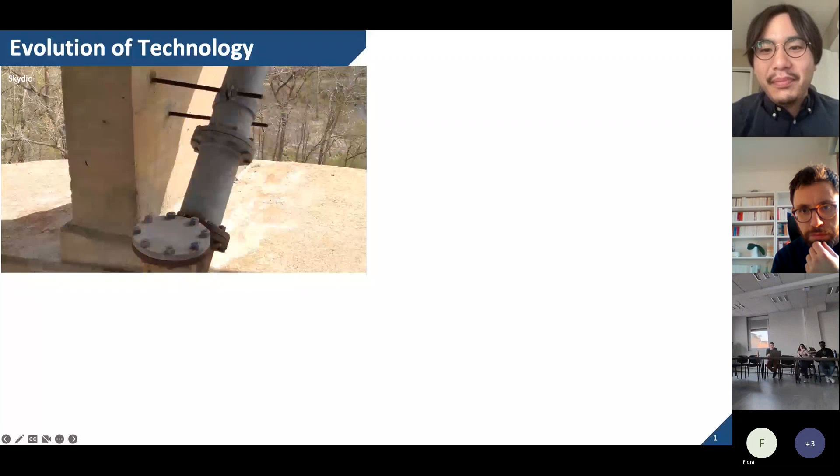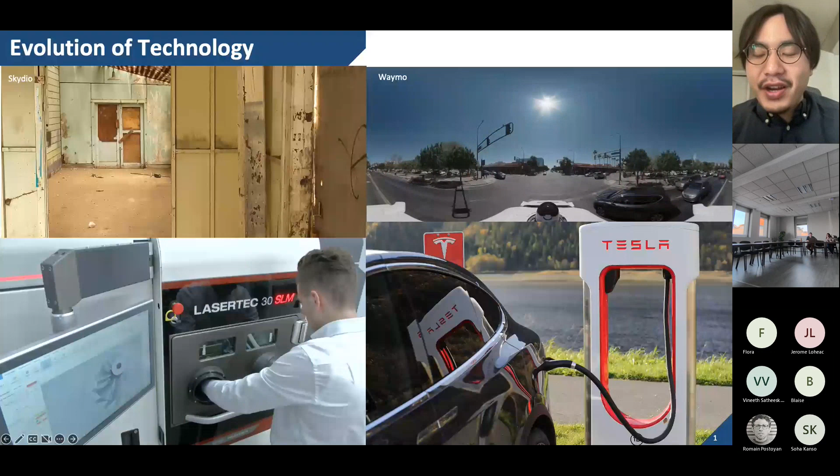The technology has been evolving so rapidly in recent years. Autonomous drones are growing capable of detecting objects using onboard sensors like LiDAR and camera, as well as efficient motion planning to achieve required tasks. Self-driving cars have been commercialized to revolutionize people's lives as novel transportation systems that do not require human drivers. 3D printing machines have been introduced in several industries to create prototypes of new parts and enable mass production using CAD software. Electric vehicles have started to appear in markets, raising high expectations for a cleaner future world with sustainable and renewable energy.

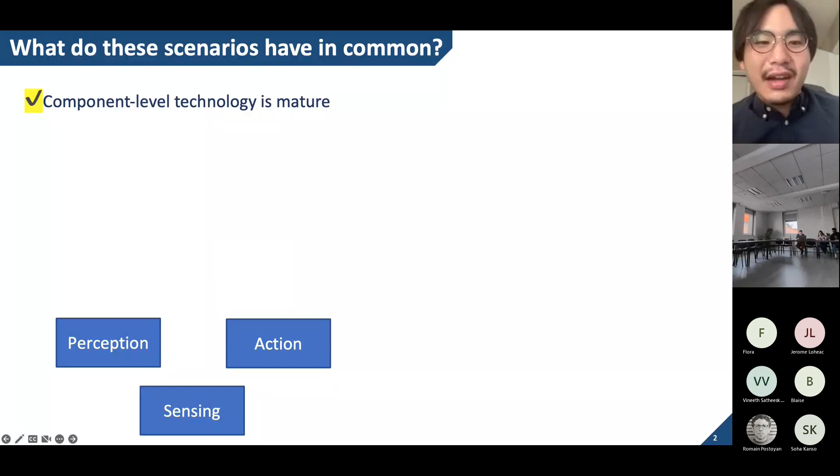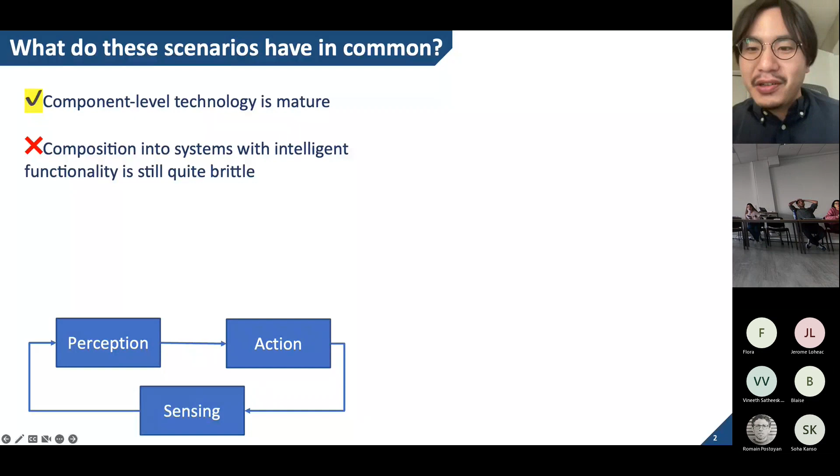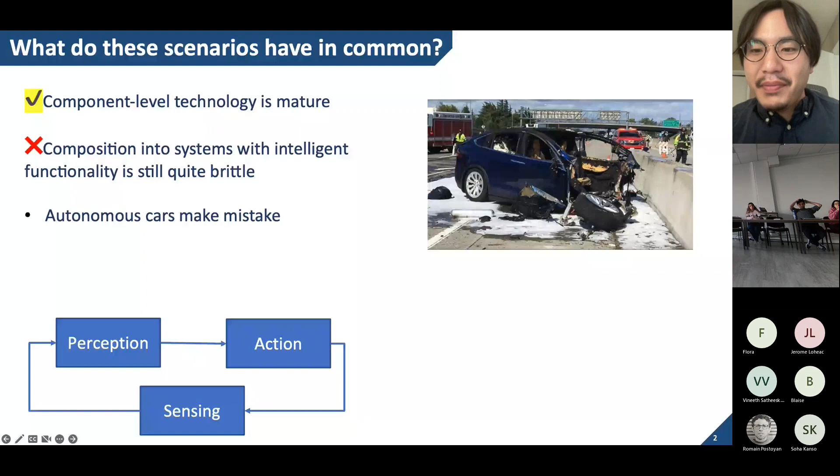What do these scenarios have in common? In all the examples, component-level technology is sufficiently mature, such as high-resolution cameras and accurate object classification algorithms. However, the composition into systems with intelligent functionality is still quite brittle, which renders a challenge when we close the loop from sensing to perception and action. For instance, autonomous cars still make mistakes, which could lead to huge accidents affecting people's lives. Also, in cases including 3D printing, performance requirements might not be met, which could cause critical errors in product quality. Intelligent control systems are needed to resolve these drawbacks.

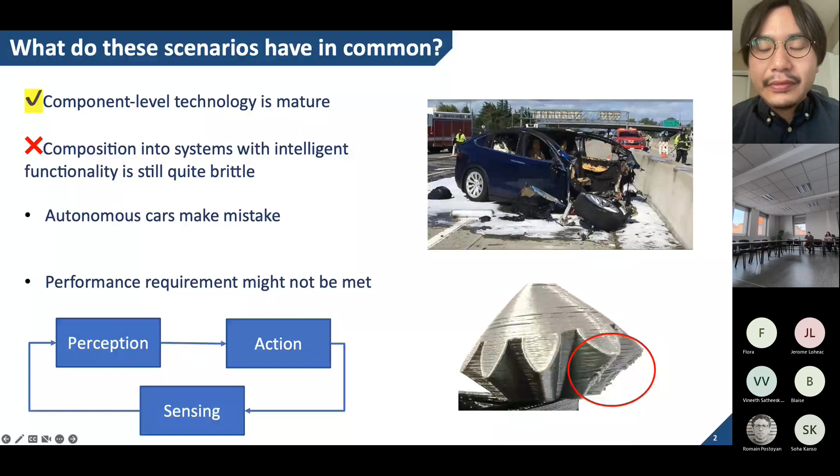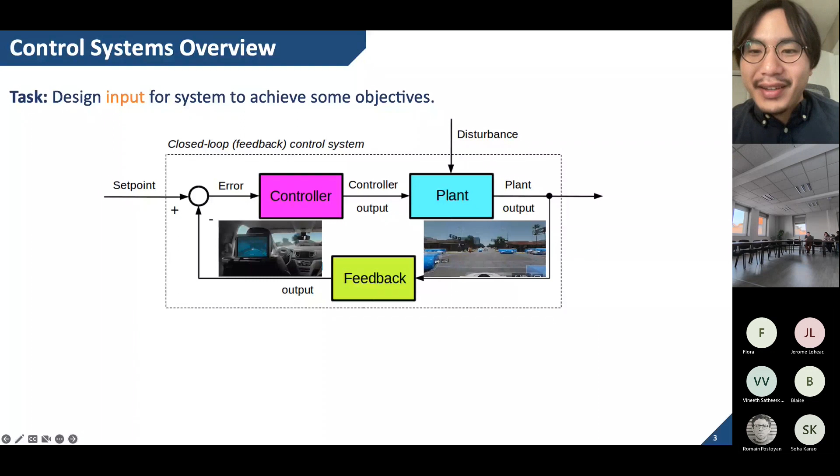The task for a control system is to design an input using a given output to achieve some objectives. For instance, in the case of self-driving cars, given an image sensor from the camera, the system detects objects and changes the acceleration, deceleration, and steering accordingly to navigate the car to the destination without collision.

There are essentially two questions arising in control design: what is the plant model, and what are the tasks in the design? The plant model is often considered a dynamical system, described by an ordinary differential equation, ODE, or sometimes a partial differential equation, PDE. The tasks could be stabilization, safety, navigation, active sensing, etc.

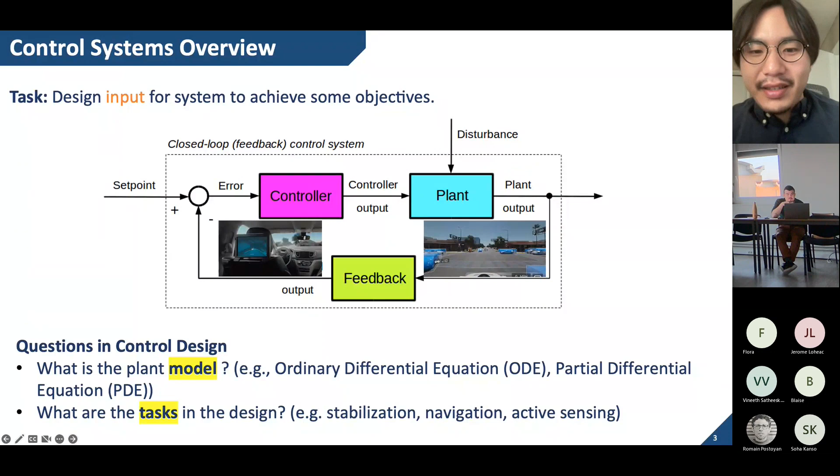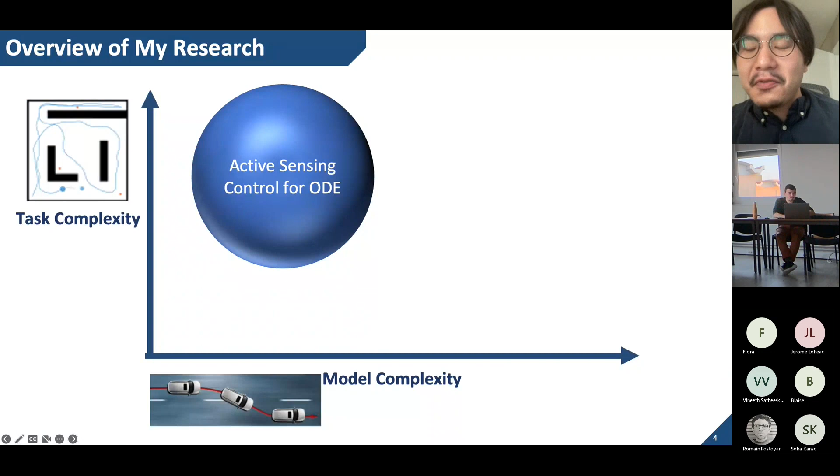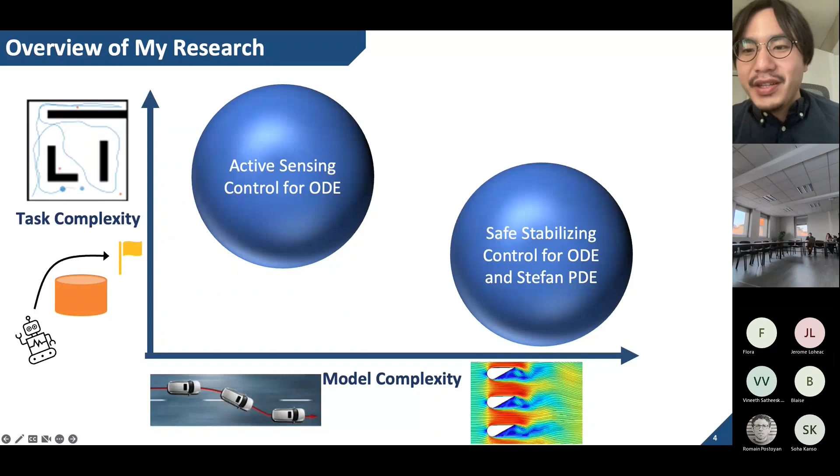So in this talk, I essentially present two topics. The first is active sensing for ODE systems with applications to robotics. The second focus is safe stabilizing control for ODE and Stefan PDE systems representing phase change dynamics.

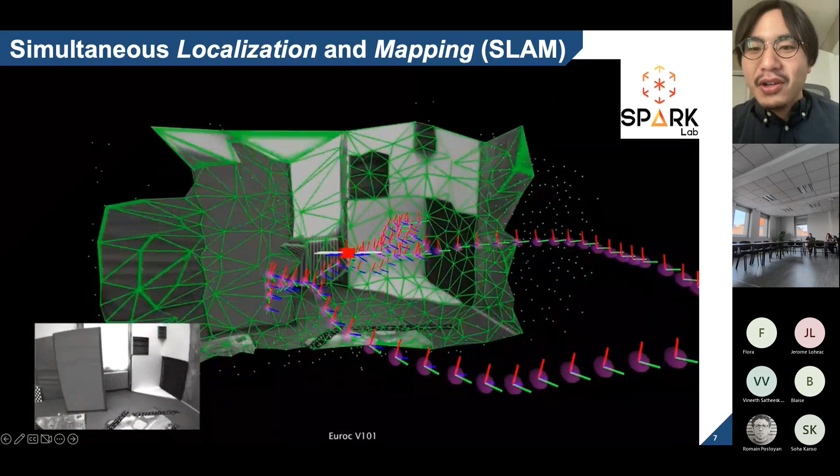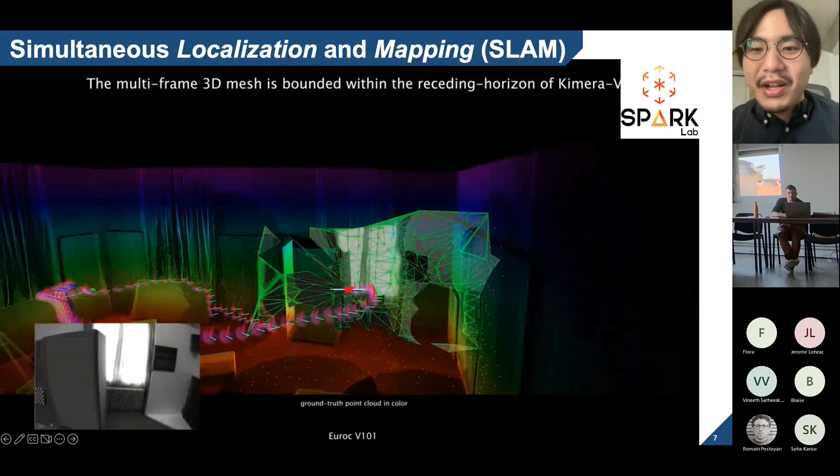Let me present the active sensing problem first. Simultaneous localization and mapping, also known as SLAM, has been emerging as a method to construct a map of the unknown environment using acquired data from onboard sensors attached to a mobile robot. This demo shows a recent tool developed at MIT SPARK Lab, directed by Professor Carlone, for a novel SLAM method to estimate metric and semantic information by enabling mesh reconstruction and semantic labeling in 3D using visual inertial measurements.

There are essentially two types of map representations. One is landmark-based mapping, to estimate predefined landmark states such as location or semantics, which gives a sparse map. The other is volumetric mapping, to estimate the occupancy or signed distance at each voxel by truncating the environment with a mesh, which provides a dense map.

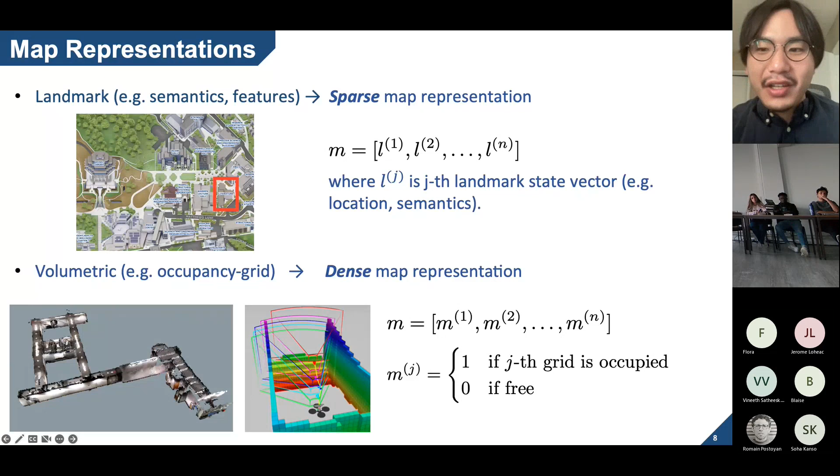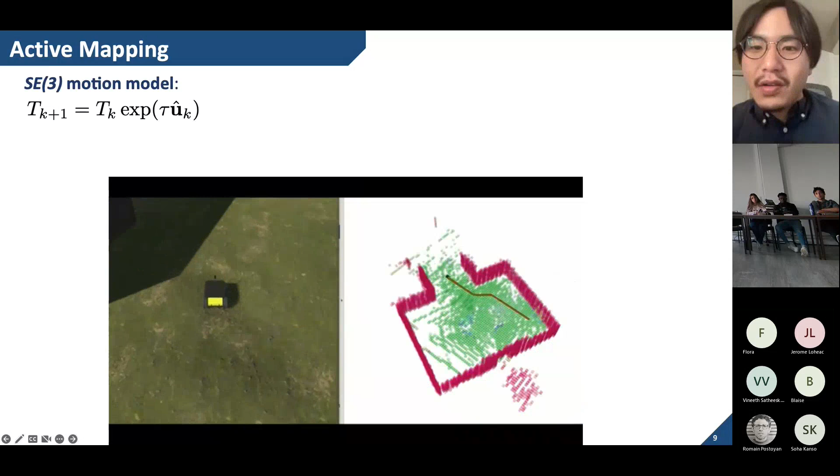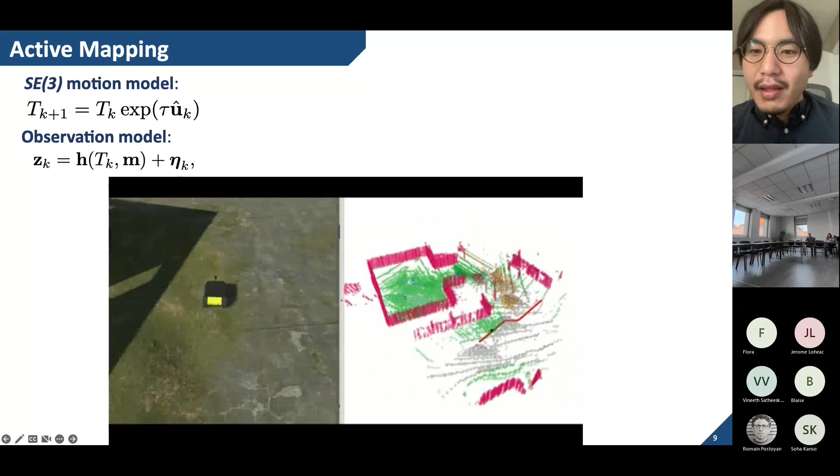Let's consider how to formulate the mapping problem. We describe the robot motion as a continuous SE3 model, which has high fidelity in robot kinematics, and the observation model as a nonlinear function with respect to the robot pose state and the map state together with Gaussian noise.

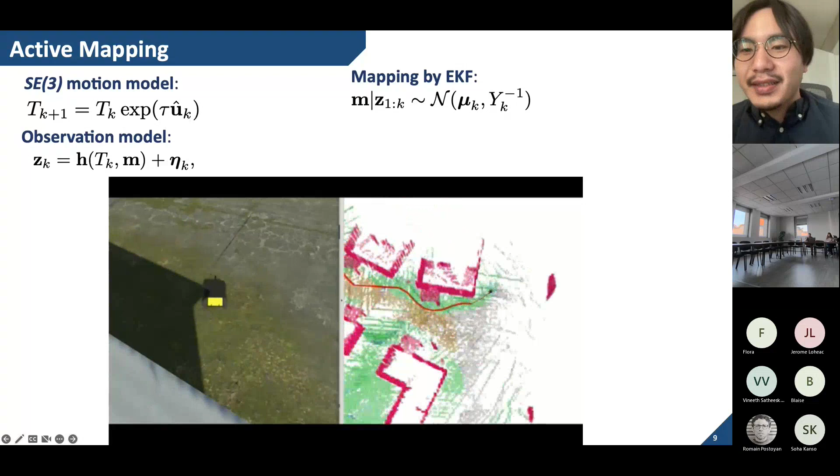We consider mapping by extended Kalman filter to obtain the mean and information matrix of the Gaussian belief given a history of the sensor states. The mean and information matrix are updated at every time step. This enables one type of mapping by EKF.

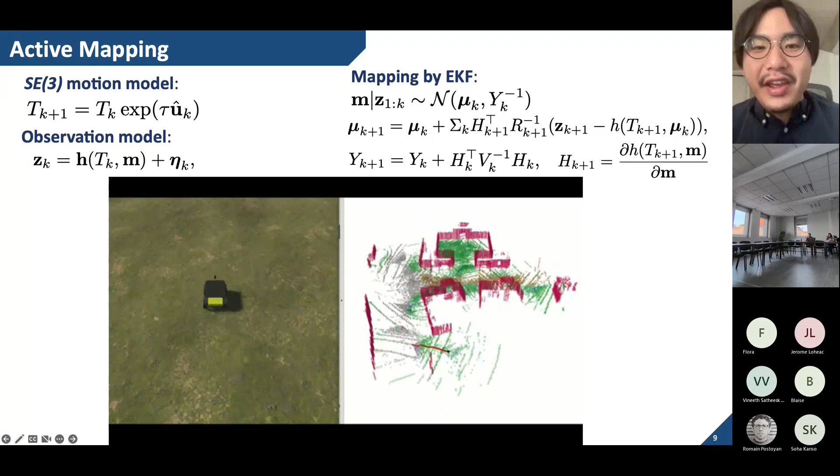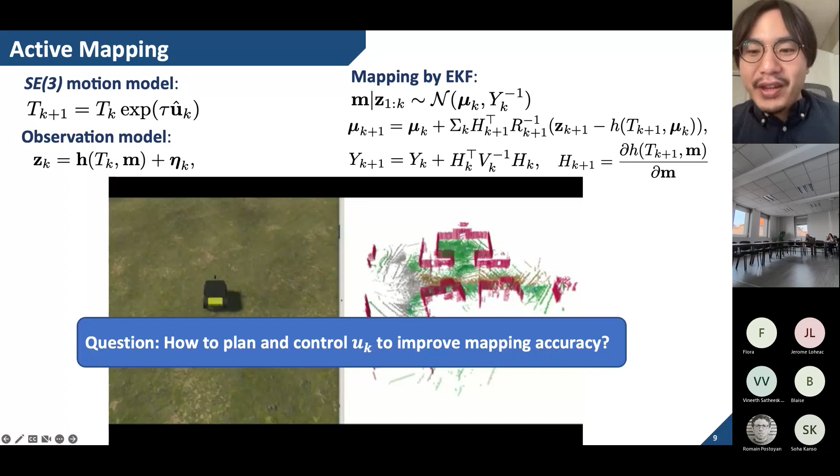However, the question is how to plan and control the input U of the robot to improve the accuracy of the constructed map. This problem is known as active mapping, one example of an active sensing problem.

For active mapping, we set our task as an information theoretic objective to minimize the entropy of the map state given a history of the sensor state. Then, owing to the Gaussian property, the problem is shown to be equivalent to maximizing the log determinant of the information matrix at terminal time.

Hence, the mathematical problem we tackle is to maximize the log determinant of the information matrix with respect to the time sequence of the multi-step control input, subject to the robot motion model and the update of the information matrix. One special thing to note is that the optimization problem does not necessitate the sensor states, and hence the computation can be done offline prior to obtaining the sensor input.

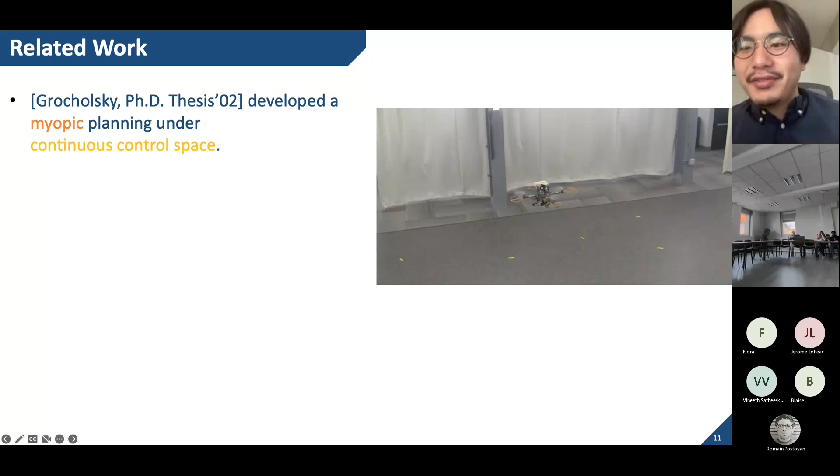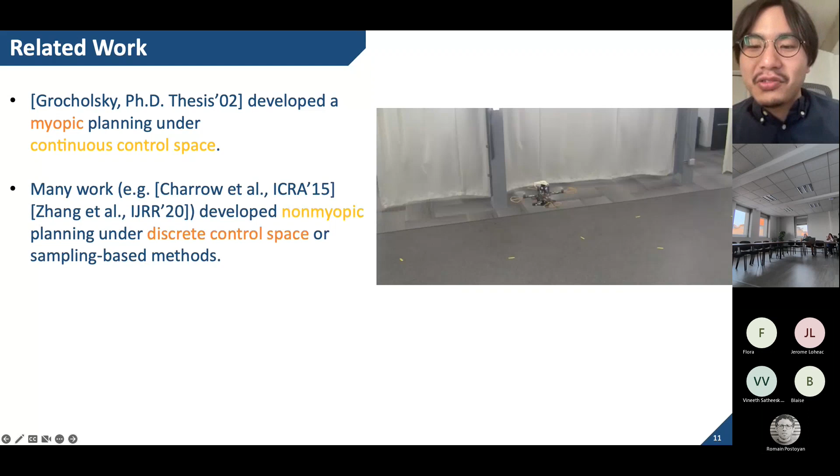There is prior work concerning information theoretic active mapping. The earlier work considered myopic planning and a continuous control space to optimize the cost only at the next time step, while many subsequent papers considered non-myopic planning for enhancing the efficiency of the planned trajectory over a long time horizon, but the methods were limited to discrete control space.

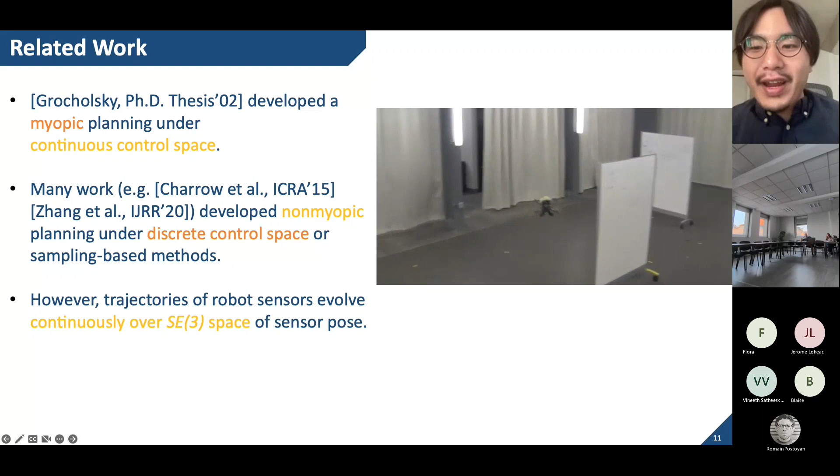However, the trajectory of the robot evolves continuously over SE3 space, and hence we set the goal of our work as developing a non-myopic planning for information theoretic active mapping over continuous control space.

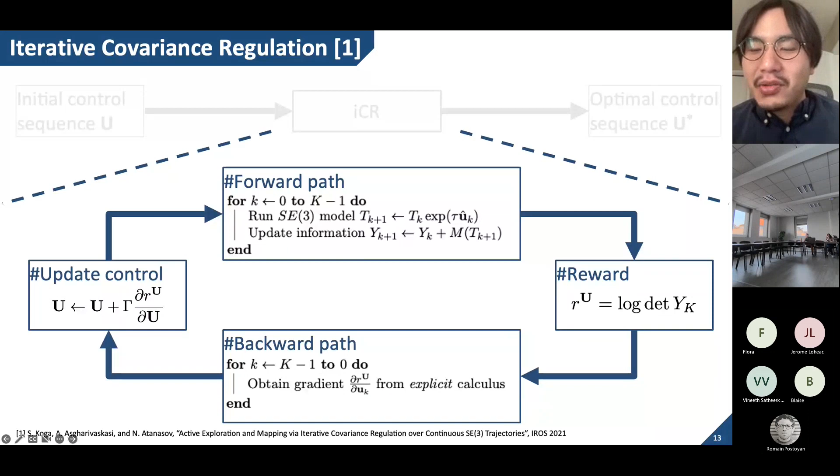We developed a novel algorithm, named Iterative Covariance Regulation, ICR, to provide an optimal control sequence given an initial guess of the control sequence. What's happening inside ICR is an iteration of the forward pass for the robot trajectory and backward pass for the modification of the control input by the method of gradient ascent.

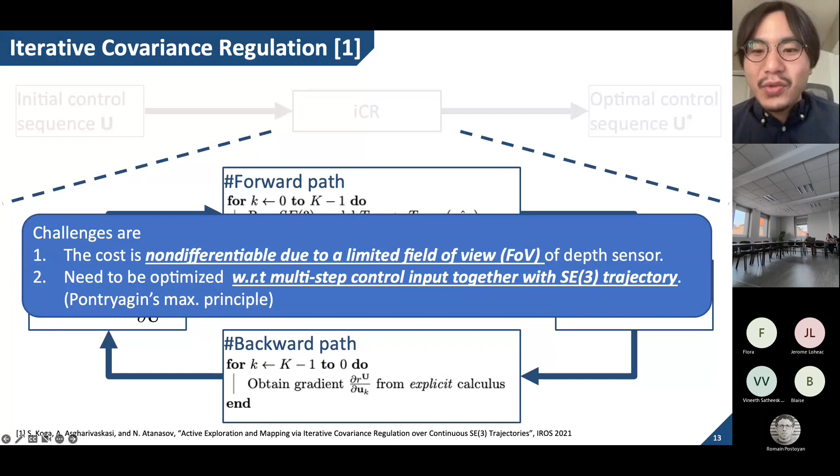However, there are essentially two challenges in this problem. One is that the cost is non-differentiable due to a limited field of view of the depth sensor in practice, which renders the challenge in solving the optimization over the continuous control space. The other is that the cost is dependent on the time sequence of the multi-step control input, which has classically been solved by Pontryagin's maximal principle and adjoint method, but the method was not generalized to matrix updates.

To tackle the first challenge, we introduced the differentiable field of view via the following procedure. The idea is that we suppose the map is fully measurable, but the sensor noise outside the field of view is infinite. Namely, the sensor matrix H is set to an identity matrix, and the sensor noise covariance matrix is set to a diagonal matrix whose diagonal element is to be formulated.

Then we consider a relative vector Q of the coordinate Pj as just the grid cell within the robot field of view coordinate. Using this relative vector Q, the diagonal element of the sensor noise covariance matrix is formulated as some finite magnitude related to the sensor noise magnitude if Q is inside F, and approximately infinite if Q is outside F.

The next question is how to reformulate the set condition algebraically. We introduce a signed distance function, SDF, which returns the distance from the vector Q to the closest boundary of the set F, with a positive sign if Q is inside F and a negative sign otherwise. SDF has been utilized in computer vision tasks to represent the shape of the object.

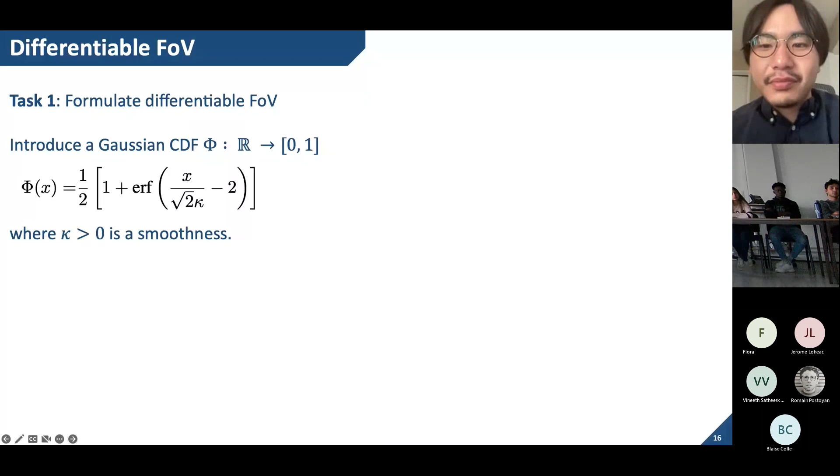Then, using SDF and taking its inverse, the inverse of the diagonal element V is given as a step function with respect to the SDF, with a coefficient related to the sensor noise magnitude. Finally, to approximate the discontinuous step function by a continuously differentiable function, we introduce the probability function of the Gaussian CDF, and the differentiable field of view is provided accordingly.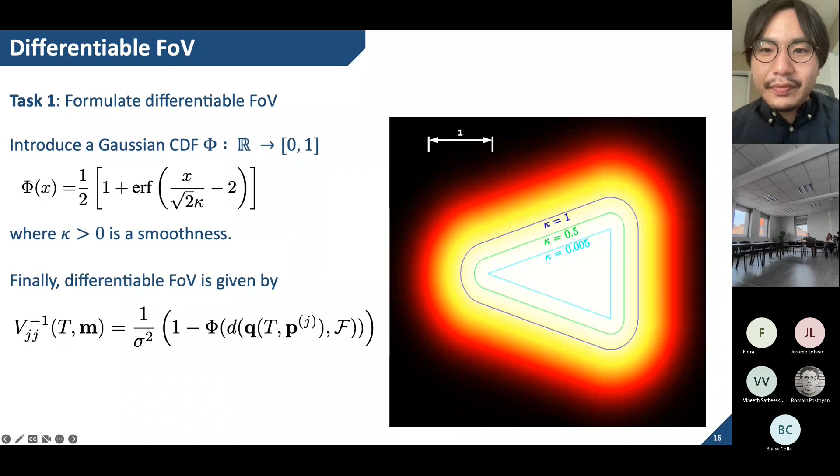The second challenge is how to obtain the multi-step gradient of the cost. We derive the analytical gradient in the following steps. First, the gradient of the log determinant is given by a trace operator through calculus.

Next, we incorporate the differentiable FoV matrices, and then apply a chain rule of derivative together with the differentiable FoV, and take derivative of Q by introducing a new state lambda as a perturbation of the SE3 state with respect to the control input, whose update is obtained by taking the gradient of the SE3 motion model with respect to U.

This is how we derive the ICR as a forward and backward iteration algorithm to obtain the optimal control sequence.

We tested the performance of ICR in the simulated environment using a real-world dataset of the occupancy grid map. Here we construct 2D mapping by a flying robot, which does not take into account collision with obstacles. We set the planning horizon as 5 seconds and the total time as 15 minutes.

Here is the video of the result. The left movie shows the result of the occupancy mapping, and the right video shows the heat map of the acquired information. We can observe that the map is accurately constructed, and the exploration is done efficiently through homogeneous information acquisition.

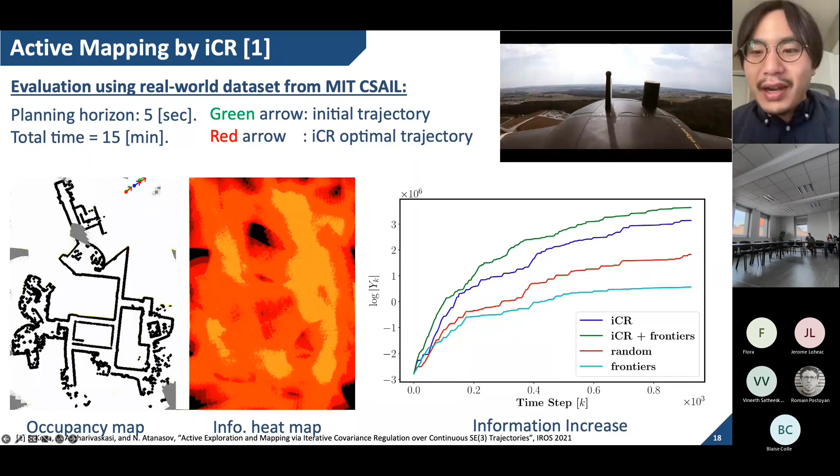Through comparison to other benchmark methods, we can also observe the superior performance of ICR in terms of information gathering.

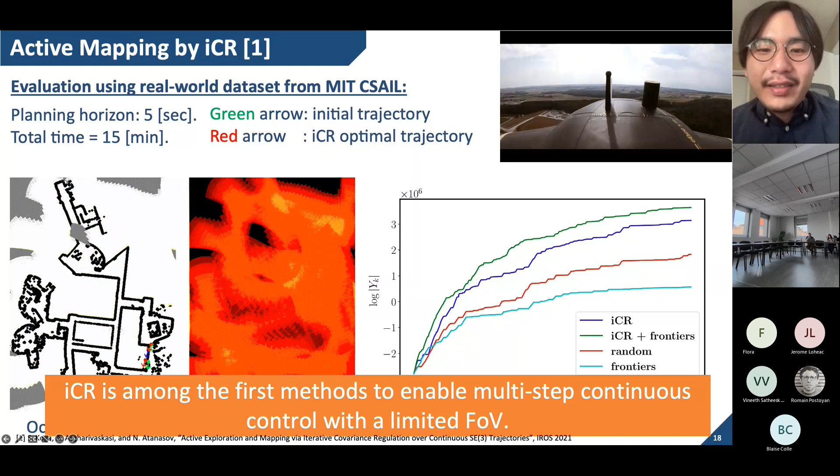So to summarize, ICR is among the first methods to enable multi-step continuous control with a limited field of view. This is the main contribution of this work.

So in ICR, we assume that the robot state is assumed to be deterministically known. But the next question is, what if the robot state is unknown and noisy?

In such a scenario, we consider localizing the robot state from the sensor states by expanding the EKF to include the robot state dynamics as well.

Then we consider a control problem to reduce the gap between the optimized trajectory from ICR and the localized trajectory as a feedback control mechanism.

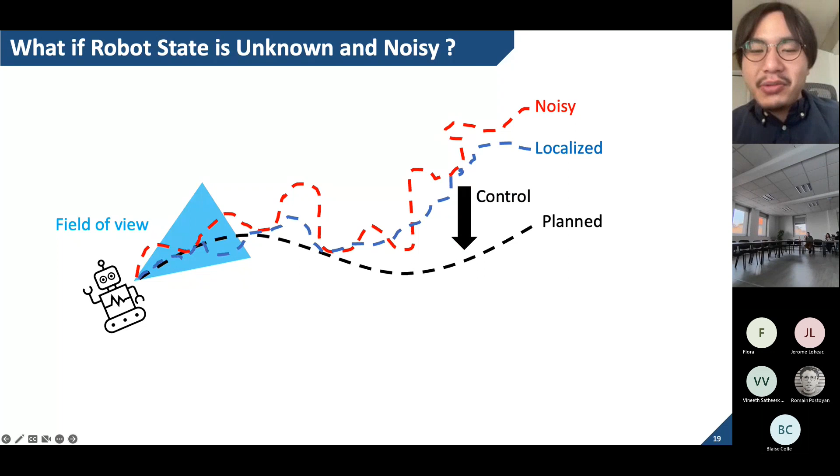So in this problem, we vectorize the SE3 robot pose state and covariance matrix state and tackle the problem of obtaining the control policy as a feedback of the robot pose state and the covariance state from EKF.

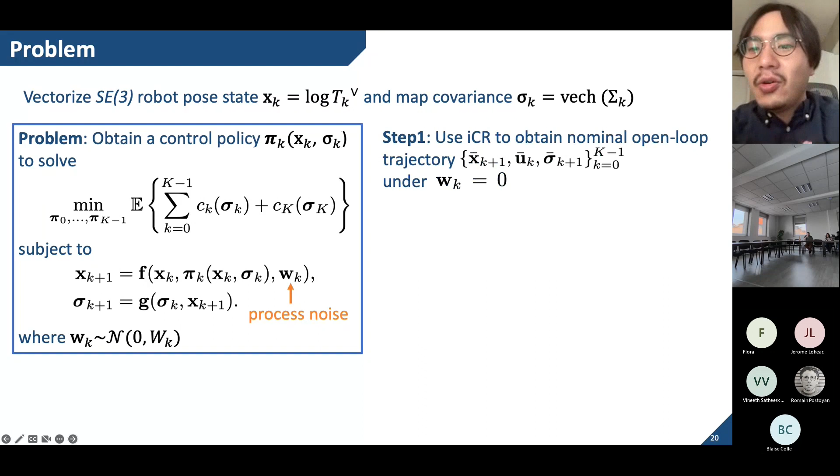To solve such a stochastic optimal control, first we employ ICR to obtain the nominal trajectory under the noise-free dynamics.

Next, we introduce the nominal error and approximate the cost as a quadratic function by Taylor expansion, assuming the localization error is sufficiently small.

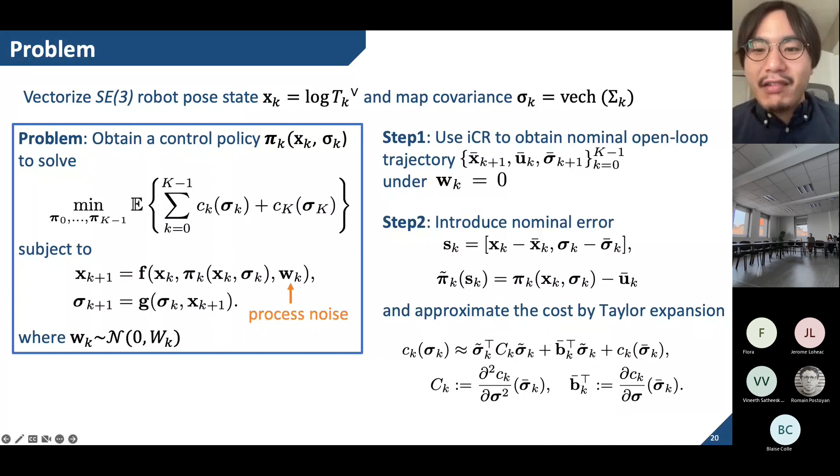Then we linearize the robot dynamics around the nominal trajectory and the cost as a weighted sum of quadratic terms for validating the linearization and approximated cost.

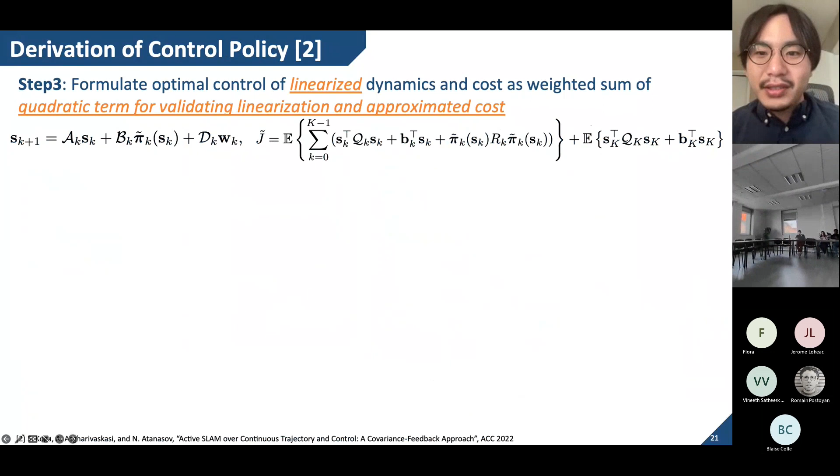Then the linear quadratic optimal control is analytically solved by extending the LQR to the inclusion of the bias term, since the cost includes the linear term by Bellman's optimality principle. This is how the active SLAM problem is solved by combining ICR with LQR.

Note that all the computation requires system matrices and hence the model-based design. Also, we replace the robot pose state by the localized robot pose state obtained from EKF SLAM.

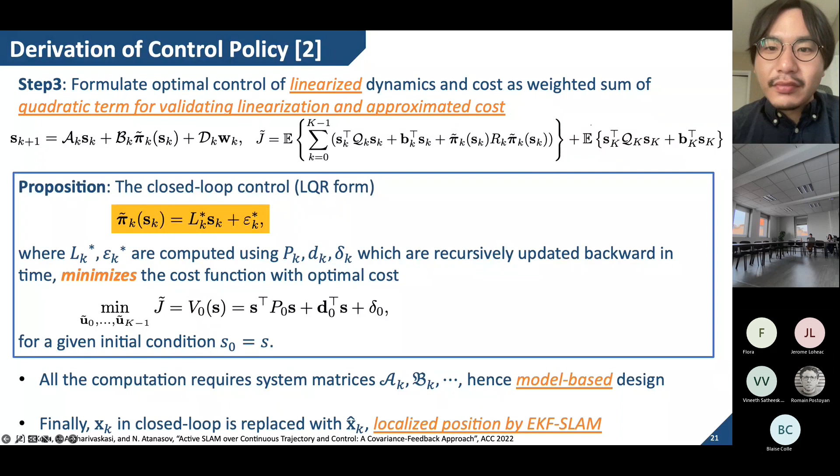Once some predefined time horizon is reached, the algorithm is returned to the initial condition and keeps repeating this process.

We can observe the superior performance of the proposed ICR-LQR in exploring the landmarks uniformly while reducing the uncertainty of the landmark position.

So there is one assumption we suppose so far about the field of view. When the field of view intersects with objects, anything behind it is not visible, even if the area is included in the original FoV. Such an occlusion of the FoV must be taken into account when we consider active sensing

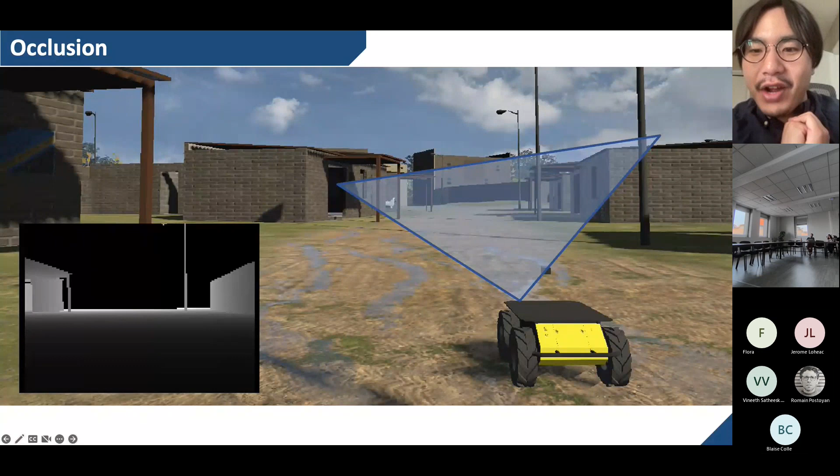in an environment including obstacles. We tackle the problem by approximating the cost of the information measure, here the Shannon Mutual Information, SMI.

In particular, we consider only the range sensor and log-odds mapping technique, which does not necessitate the sensor model as Gaussian. Instead, the SMI needs to be approximated to handle this scenario.

We approximated it as a convex combination of the SMI in nearby viewpoints, while this nearby view SMI is still not differentiable. We introduce a probit function to make a smooth approximation, similarly to ICR.

Also, the SMI in the nearby viewpoints can be formulated in an occlusion-aware case, so the planning to optimize the resulting approximated cost is occlusion-aware.

In addition to the approximated SMI, we also include the collision penalty and the sensor FoV overlap penalty to enhance the applicability of the method in practice.

The resulting cost is both differentiable and occlusion and collision aware, and thus we apply the multi-step gradient ascent technique in ICR.

The proposed method is demonstrated in a hardware robot experiment as shown in the video. The upper right corner shows the movement of the car robot, and the lower left corner shows the RGB image and depth from the camera sensor.

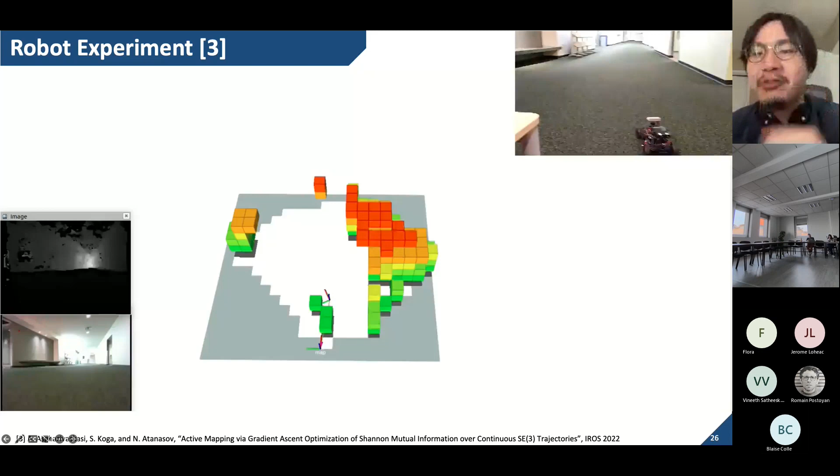And the constructed map is shown in the center. We can observe that the robot efficiently explores the hallway without getting too close to the walls to avoid collision and occlusion, and the environment map is accurately acquired.

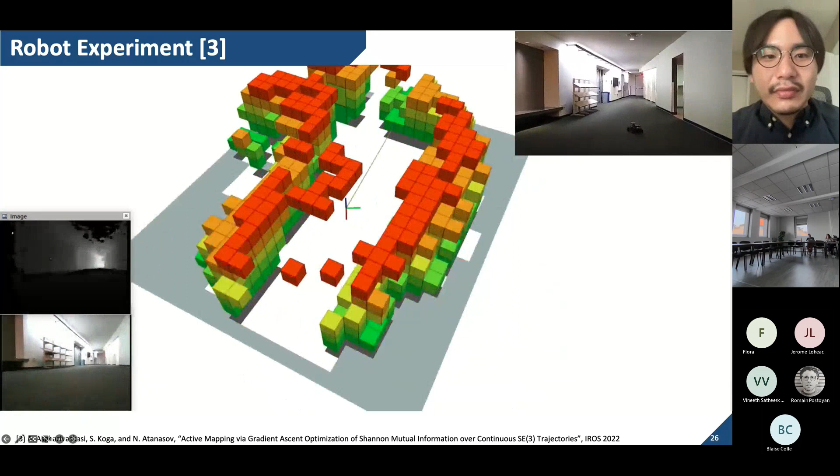So while the proposed method so far gives the offline planning of the motion for a given environment, the obtained control cannot be directly applied to a new environment without recomputation.

The next question is how to learn a control policy from several available data of different environments, including indoor, outdoor, or even the underground scenario.

We consider an active landmark-based mapping to localize the multiple landmarks. The control policy is trained with a randomized number of landmarks and a randomized initial condition of the robot state, landmark state, and uncertainty.

We develop a method to learn a continuous control policy for active perception. The control policy is set to a deep neural network, and the policy optimization is done by proximal policy optimization, PPO, which is a popular model-free RL algorithm over continuous control space.

There are two special features in this algorithm. One is to introduce the differentiable FoV to stabilize the convergence of the training as a reward shaping. The other is to incorporate an attention block in the network architecture to handle the varying number of multiple landmarks during the training.

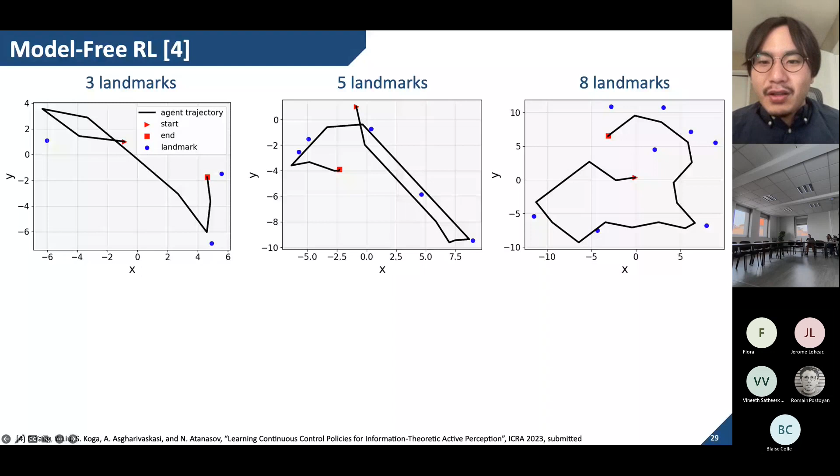The landmark policy is also combined with volumetric mapping for a joint exploration and landmark localization task, by setting the reward as the weighted sum of the two rewards. The performance is promising in terms of the exploration-exploitation policy to visit the landmark first and then explore the environment.

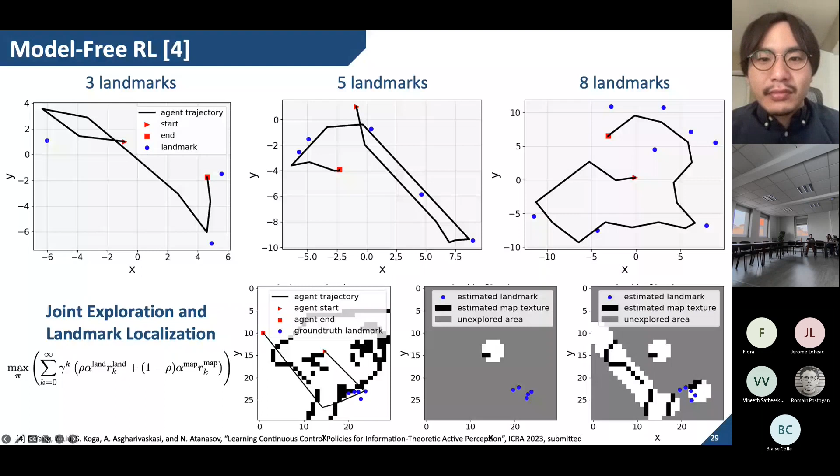Next, I present the control for the safe stabilizing control task for the ODE and the Stefan PDE system, in the second part.

Can I proceed with this part, or is there any question at this moment? All right, maybe I can proceed with the second part. You can, Shumon. Sorry, you can. All right, got it. Thank you.

In the presence of obstacles and other robots, planning in an unknown environment needs to account for collision avoidance to ensure safety of operation. The penalty method mentioned earlier does not ensure feasibility of the optimization problem. Thus, the question is whether we can synthesize control for safety and other tasks, such as stabilization, from a systematic perspective with provable performance.

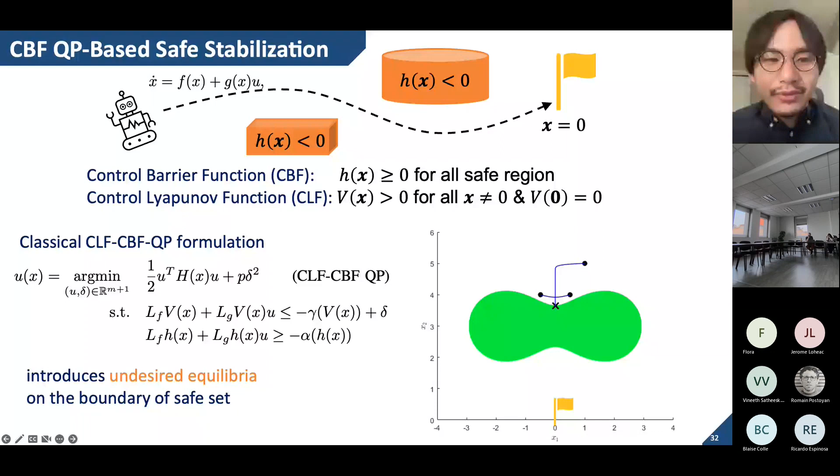We introduced a new idea to design safe stabilizing control by differential complementarity problem, DCP. The basics of DCP are as follows.

DCP is given by a differential equation of y with an additional variable z, which has a relation of the complementarity condition. Namely, the complementarity condition provides that both z and the capital C term are maintained non-negative, while the inner product of these two is kept at 0.

Especially in the case of z being scalar, z is set to 0 if the condition C is strictly positive, and z is activated to be a positive value if the condition C reaches 0.

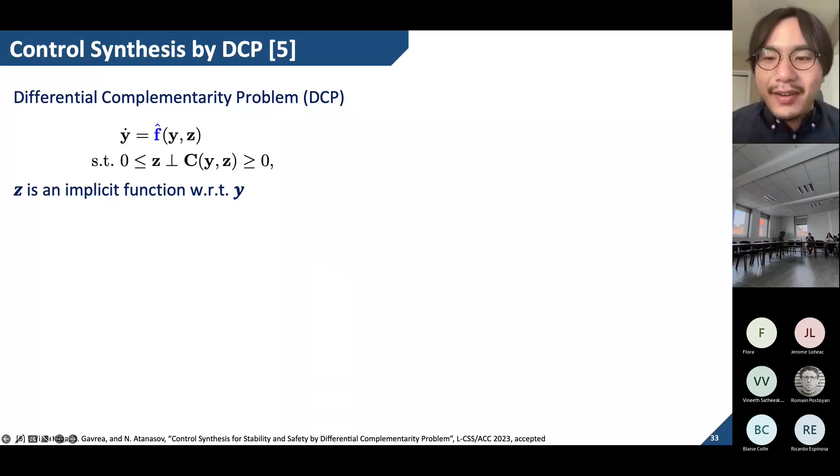The formulation represents such a mode switching, which has been applied in modeling dynamics with contacts, as a hybrid system under constrained nonlinear optimization.

Our new idea is to design a safe stabilizing control by DCP, to switch the modes of the CLF and CBF constraints.

In particular, the control input is decomposed into 2 parts, with 2 variables, a scalar and a vector, for each, w_l and ū_l, and w_h and ū_h. The scalar value is utilized as a complementarity condition of the CLF and CBF.

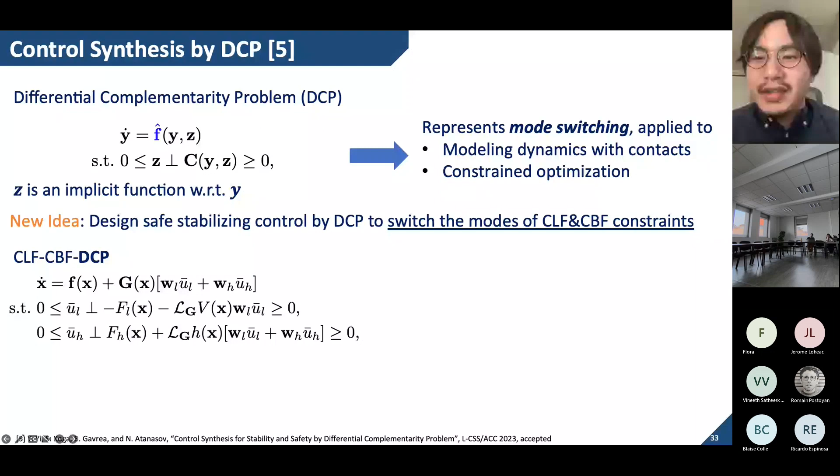Here we can see that safety is enforced more than the stability condition, since the CBF condition takes into account the sum of the 2 inputs, while the CLF condition only takes into account 1 input.

Then, using a known result about the existence and uniqueness of the solution to DCP, we can derive the condition and the appropriate choice for the vector parameters. This renders the CLF-CBF DCP control design.

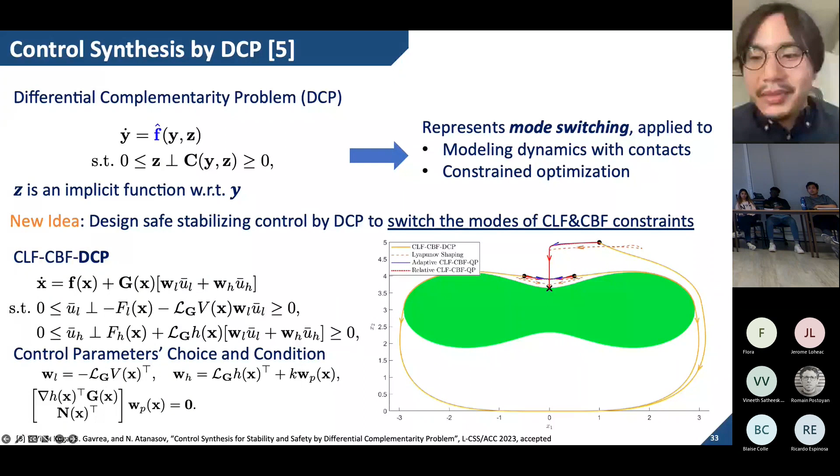We tested the DCP control on the same simulated scenario as in the previous slide. The figure illustrates that our DCP control successfully achieves joint safety and stability, while the recent modified QP-based methods are still stuck at the boundary of the safe set.

This shows the superior performance of DCP-based methods in terms of joint safe stabilization.

While we only considered one robot to control so far, some more complicated tasks should be tackled by numerous robots. Then the question is how to handle such a swarm of robots. Modeling and controlling each robot one by one might struggle with the computational burden.

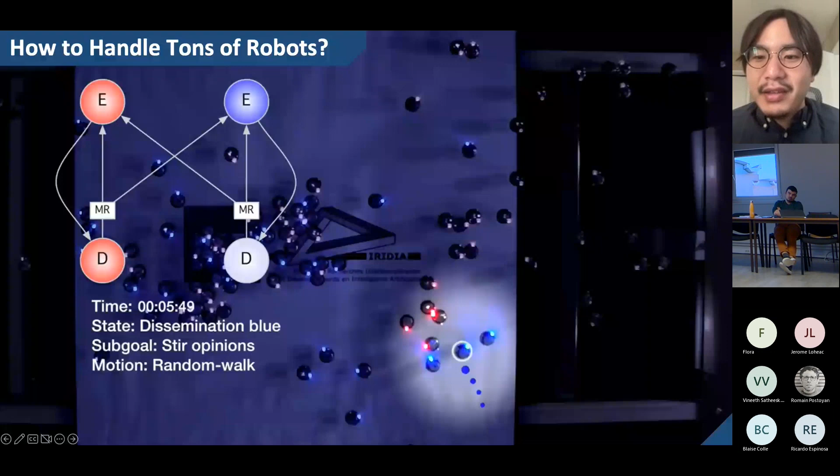Recently, modeling the swarm of robots from a macroscopic perspective to give the PDE dynamics of the density of the robots has been proposed, which motivates us to expand the applicability of control theory and methods to PDE models.

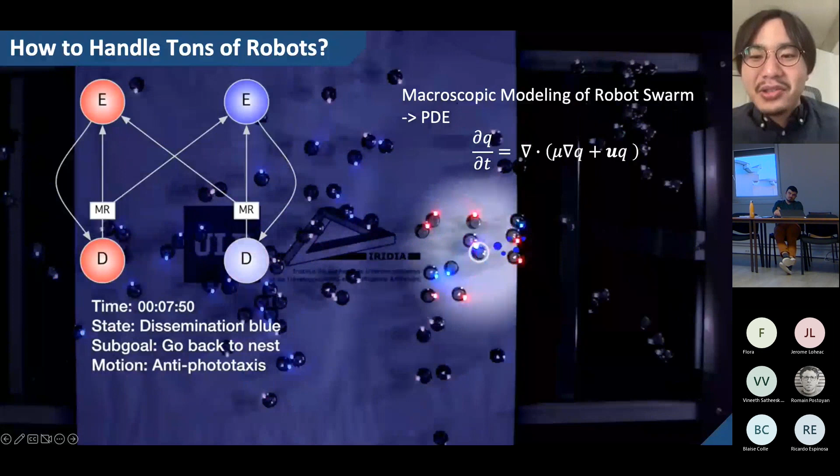This motivation brought me the question: what is among the most challenging classes of PDE systems to be handled by control theory?

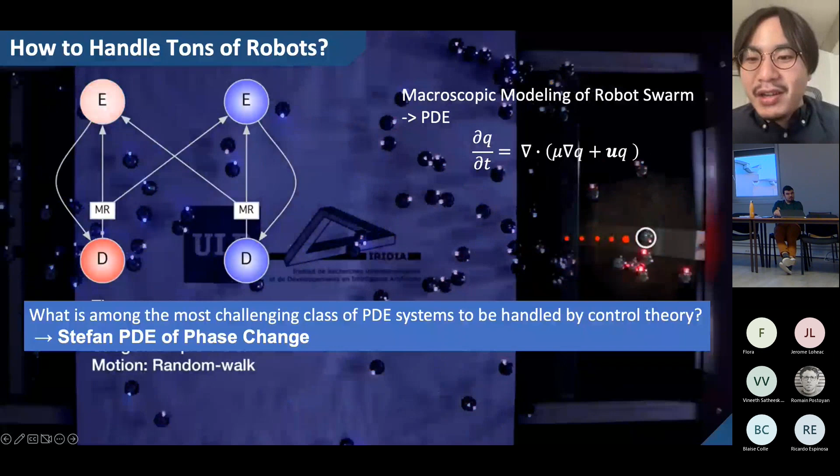There's one special PDE model, the so-called Stefan problem, representing the dynamics of phase change. Phase change appears a lot in the real world.

3D printing is processed through melting solid metal powder into liquid metal and re-solidifying it layer by layer to fabricate the final desired shape and texture of the product.

The charging and discharging in batteries renders the material's phase change of the particles in the electrodes to enable energy storage.

Melting of the Arctic sea ice is observed rapidly in the recent decade, and one research states that we will see ice-free summers in the Arctic by 2050. Sea ice melting could promote global warming through the loss of solar energy reflection.

A new thermal energy storage system with phase change has been developed for utilization in spacecraft, to neutralize overheating through combustion in the spacecraft.

Let's consider a simple model of the Stefan PDE of that kind of thermal phase change. Consider a cylindrically shaped phase-changing material, completely occupied by the liquid phase on the top region and the solid phase at the bottom region.

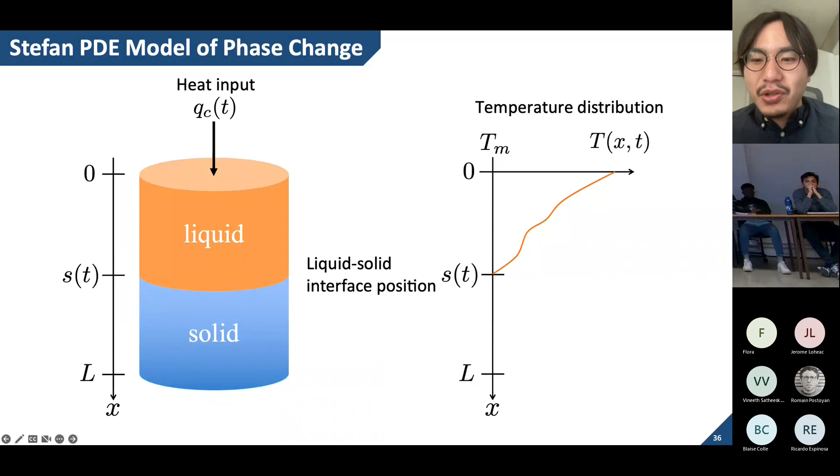The physics-based model of such a phase change is described by the Stefan problem, which is given by a PDE of the temperature distribution associated with the ODE of the liquid-solid interface.

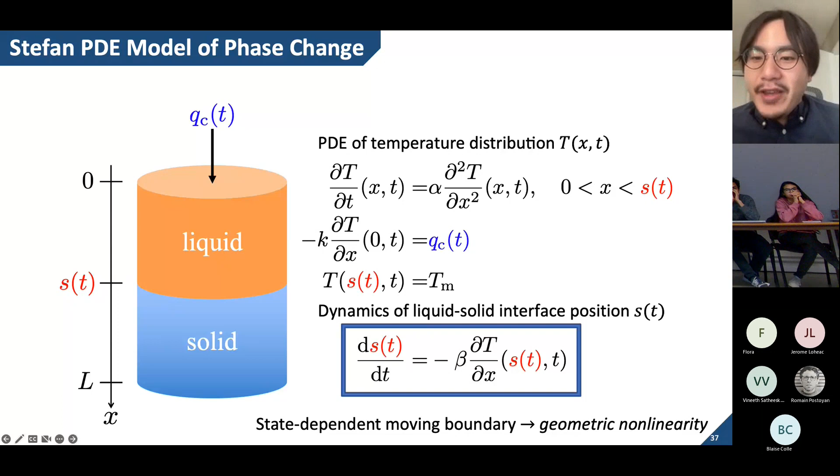Due to the fact that the interface is defined as a domain of the PDE, and the dynamics depend on both the temperature PDE state and the interface position, such a state-dependent moving boundary problem renders the total system a geometric nonlinearity, which had not been treated by control theory before my work.

We consider the self-stabilization task to drive the liquid-solid interface position to the desired set point S_r by manipulating the positive heat input Q_c, where the desired depth must be deeper than the final depth under zero input. Here, the safety condition requiring the liquid temperature to be greater than the melting temperature needs to be satisfied.

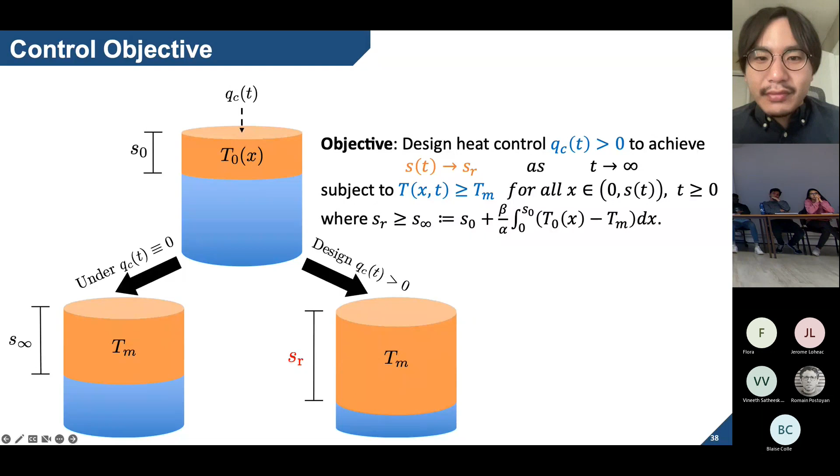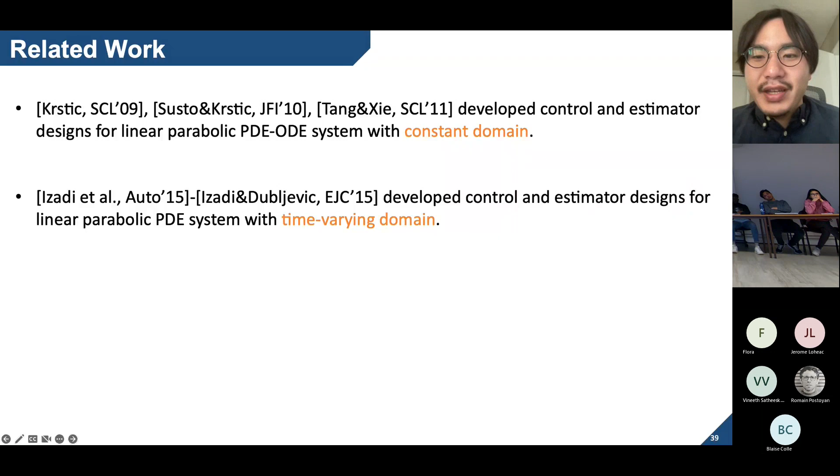However, the Stefan problem—a parabolic PDE with a state-dependent domain governed by an ODE, resulting in a nonlinear system—had not been treated by control theory before my work.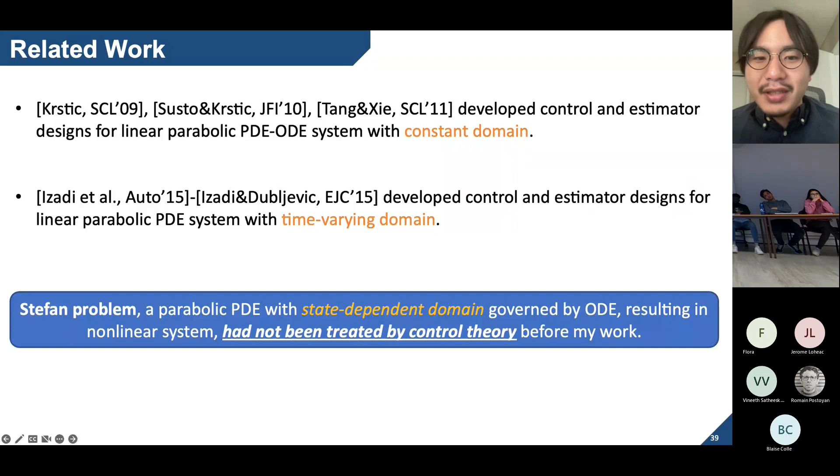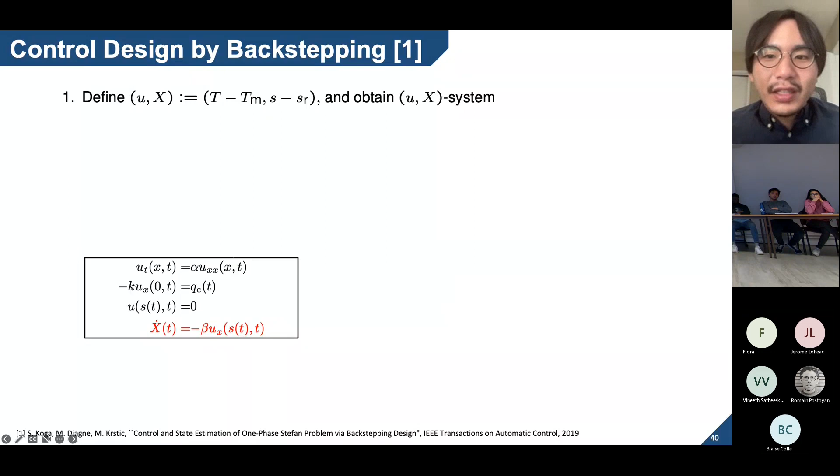I tackled the control design problem by extending the infinite-dimensional backstepping method to be applicable to the Stefan problem as follows. First, I define the reference error states to be stabilized at zero, and then develop a state transformation to convert the system to a newly defined state W, so that the system after the transformation has a stabilizing term in the ODE.

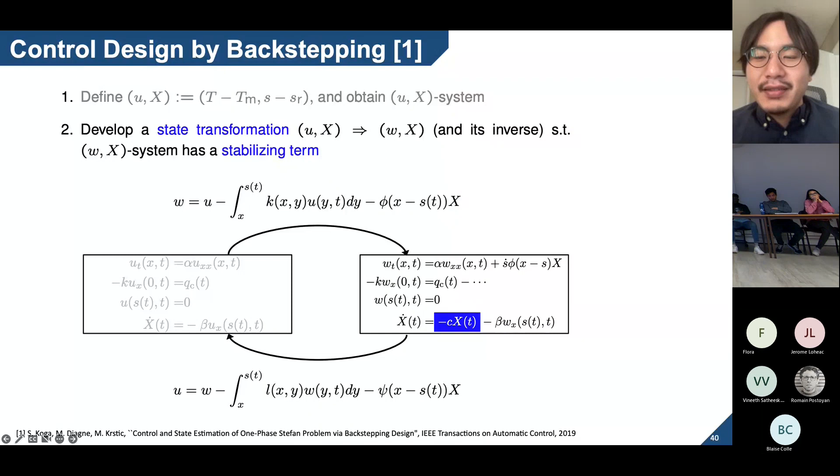Finally, the control law is designed to cancel the redundant terms on the boundary condition, which appear through the transformation. This is how we can design the backstepping-based control for the Stefan PDE.

The stability of the system is shown by applying Lyapunov analysis. In particular, first we apply Lyapunov analysis to the transformed W system, and using the equivalent stability property between the original and this W system through the transformation, we can guarantee the stability of the original problem.

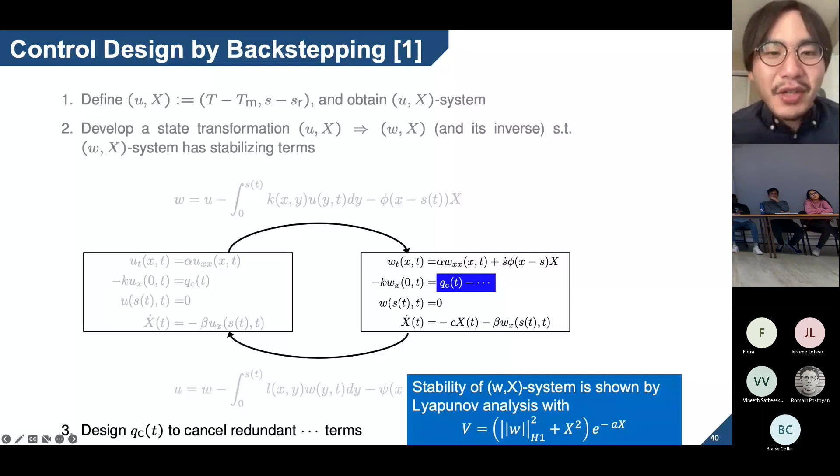Then how to ensure the safety? We focus on the potential energy as a reference error that states the temperature dynamics and the interface position, which satisfies a very simple, nice differential equation saying that the time derivative of energy is exactly the same as the heat input Q, which is actually the energy balance and the first law of thermodynamics.

Then the designed backstepping controller happens to be in the form of negatively proportional to the potential energy reference error. And then the form of the heat control input is equivalent to some sort of energy shaping control. Hence, with this nice property, we can guarantee the positivity of the heat control input, which satisfies the input constraint in the problem.

Then finally, by applying the maximum principle for parabolic PDE, which is the very well known analysis for the mass analysis of PDE, we can see that if the heat input Q is positive, then the liquid temperature is greater than the melting temperature, which is physically very reasonable because it essentially says that if the heat input keeps injecting positive heat, then the liquid phase keeps melting without solidifying from the boundary of the heat input.

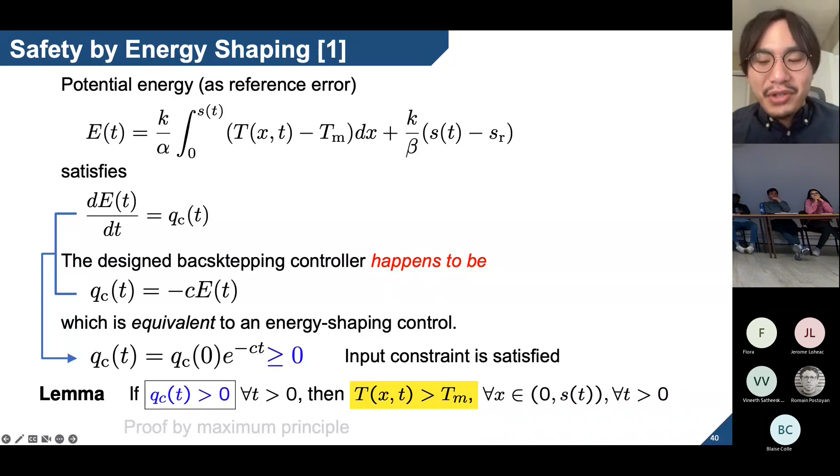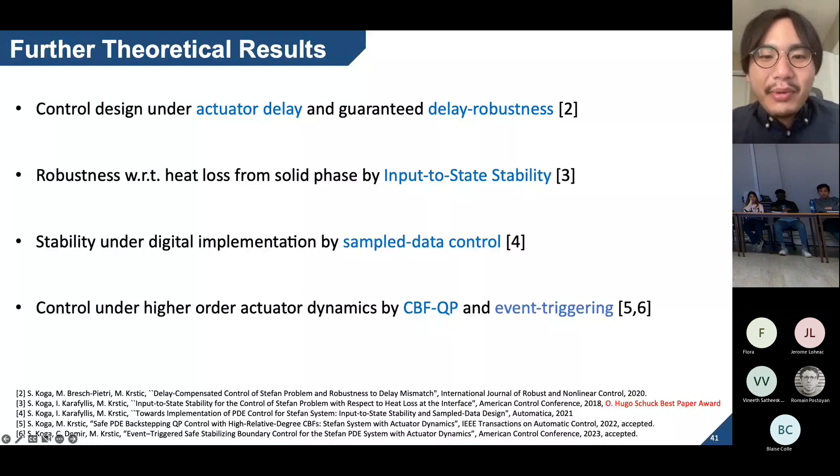Owing to the systematic property of the PDE backstepping method, I have further developed the design and theory to other situations, such as presence of time delay and model perturbation. The digital sample data control setting, applying the well-known zero-order hold to the continuous time design, is shown to achieve stability under the least assumption on the sampling time interval. In the presence of actuator dynamics, safe stabilizing control has been developed by applying the high-order control barrier function and quadratic programming-based technique, and we have also developed the event triggering mechanism for that.

I have also demonstrated the performance of the control of the Stefan PDE in a physical experiment of melting paraffin. As outputs, the surface temperature is measured by a thermocouple, and the liquid-solid interface is measured by a ruler. The heat input is controlled by changing the input current, which is connected to the heater wire attached at the surface.

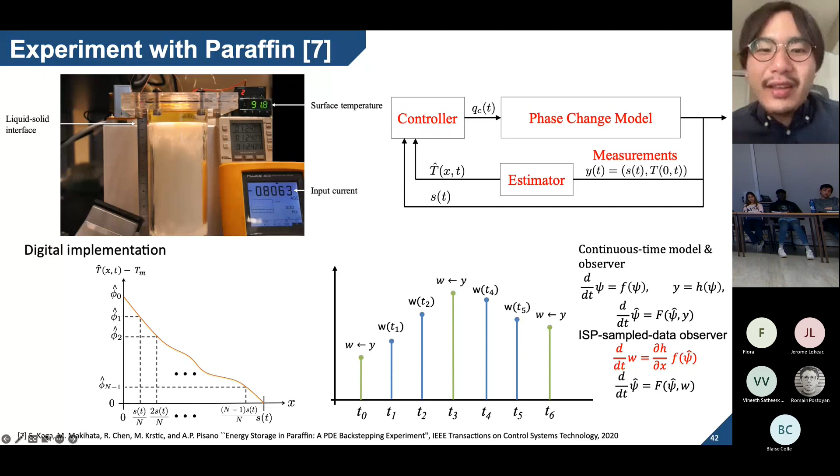Using this output, we employ an estimator of the temperature as a copy of the plant and execute the designed control input by the PDE backstepping. For implementation, the profile is truncated at a finite number of grid points, and sampling is incorporated to enable the digital implementation of the proposed observer through time discretization, also by taking into account the future prediction of the output value from the sample data design.

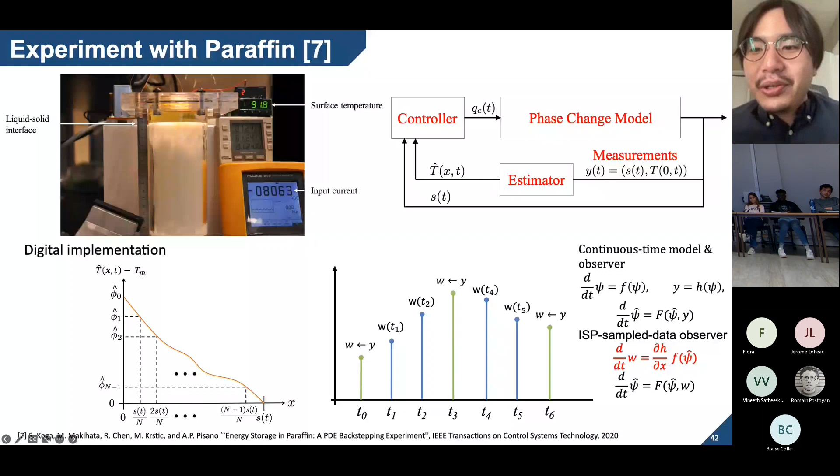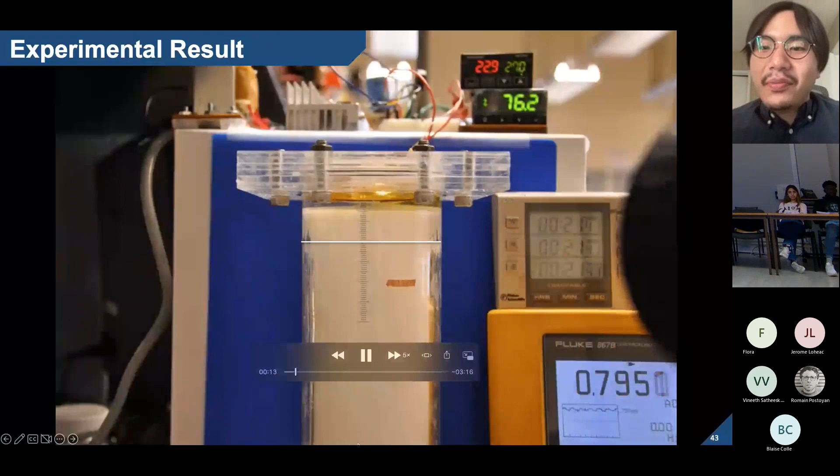So this video shows the experimental result. The set point is set to 2 centimeters, depicted as a white line in the image. After controlling the heat input, the paraffin is melted from the top surface of this cylindrically shaped material, and the liquid-solid interface position is gradually converging to the set point position, 2 centimeters from the top surface. Once the interface position arrives at the set point, the melting process is almost stopped.

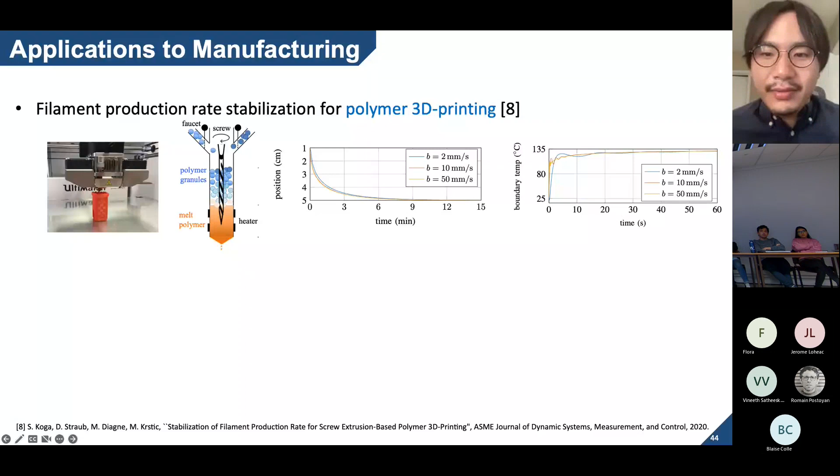So I have demonstrated the efficacy of the proposed control methods in applications to 3D printing in a simulated scenario. In polymer 3D printing, screw extrusion is considered, and the heat input needs to be adjusted based on the given operating mode for the fabrication speeds through feeding the polymer granules, where I show the desired stabilization for any given operating mode from slow to fast. In metal 3D printing, a laser sintering process is considered, generating a thin melt pool in micrometer scale, layer by layer, for fabricating the final object, successfully achieved.

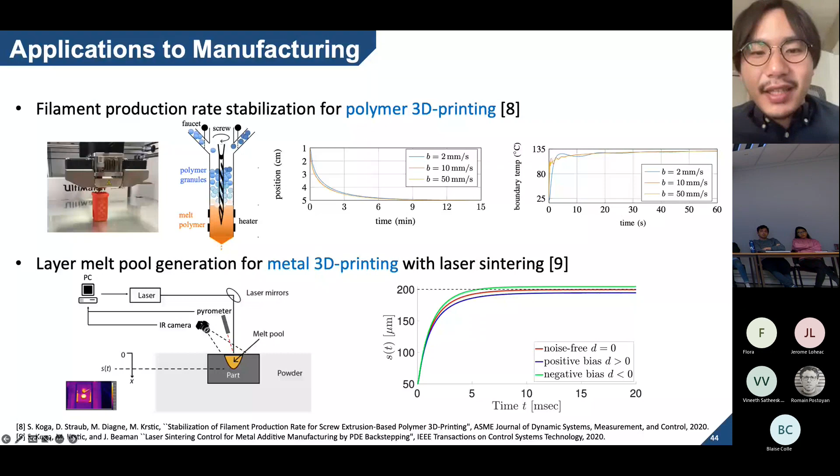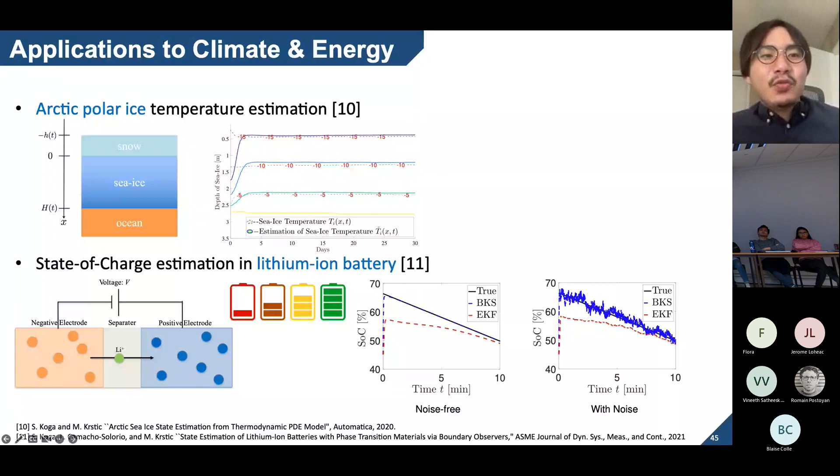So this was the end. This is the end of my talk. I essentially presented two topics: active sensing and safe stabilizing control for ODE and PDE systems. Thank you very much for your kind attention, and I'm very happy to take any questions.